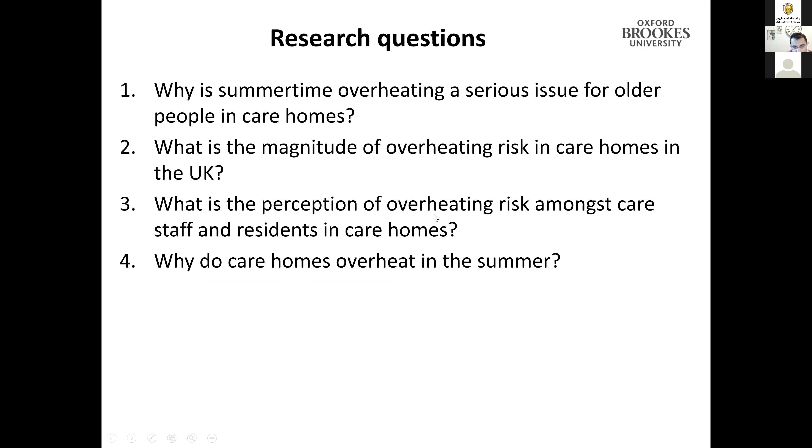Why do care homes overheat in the summer? We understand that they do, but why? And to what extent can we adapt care homes using passive measures? So I'm going to run through the presentation with these questions in mind, and then show you how we can address these questions. Just a little bit about us.

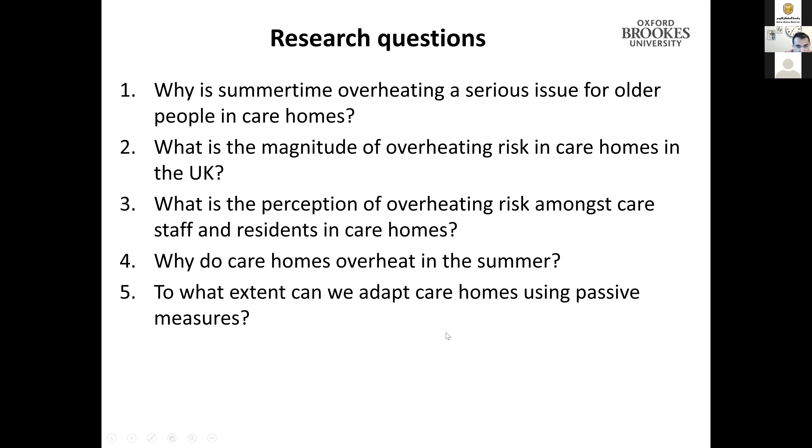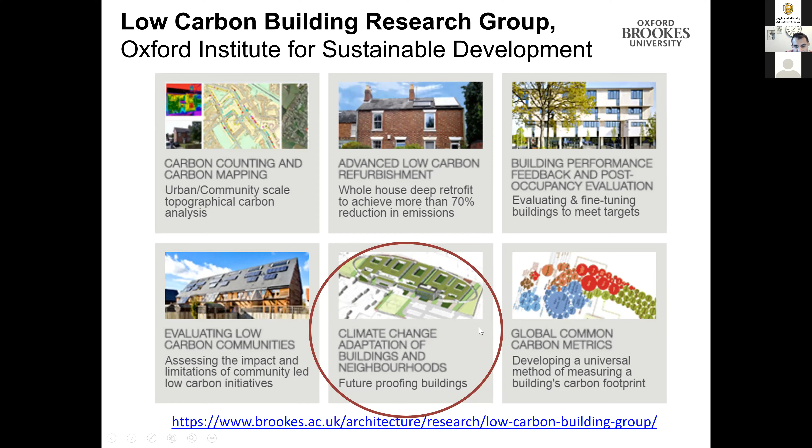I run the Low Carbon Building Research Group and also the Oxford Institute for Sustainable Development at Oxford Brookes University. I'm also now chair of the Sustainable and Resilient Futures Network at the university. We have core areas of research, and I'm going to focus today on our work on climate change resilience and adaptation of buildings and neighborhoods. Within this area, we have a portfolio of research on climate resilience of care settings. I think we are one of the few research groups in the world who research in these settings.

I'm going to run through some of our research projects. We started doing this about 7 years back, where we started with the Joseph Rowntree funded project looking at care provision fit for a future climate. We did 4 case studies across the UK.

We then went on to do a pilot study funded by NERC, the Natural Environment Research Council in UK, called Climate Resilience of Care Settings. We called it a pilot study because we looked at about 5 London-based care homes, and this was with UCL and LSHTM.

Then the third project, which is ongoing, is also NERC-funded, but now extending the pilot study spatially and over time. We have a nationwide study where we are recruiting 50 care homes. It's probably the definitive study on care homes in the UK, and we are also trying to do longitudinal monitoring.

Not just one summer, but three summers. This is ongoing at the moment. It started last year but stalled because of COVID, and now has restarted. So I'm going to run through these projects to answer the research questions that I've set up.

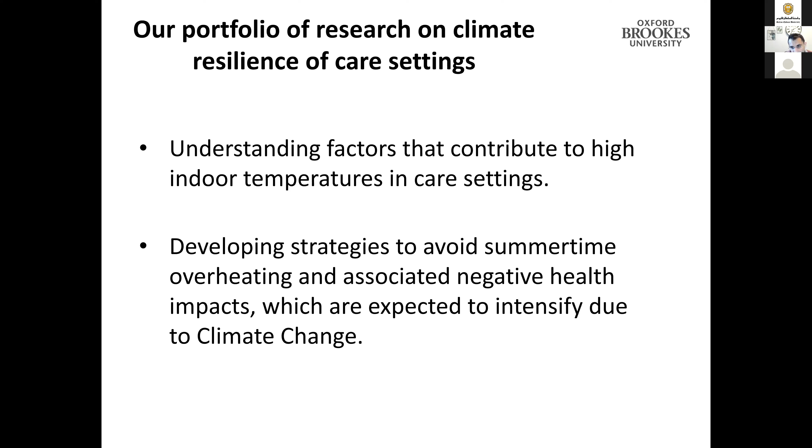Our portfolio of research is focused on understanding the factors, both technical and social, which contribute to high indoor temperatures in care settings. We want to develop strategies to avoid summertime overheating and look at negative health impacts, which are expected to intensify due to climate change. We've been fortunate to work with social scientists and health scientists on this project, looking in detail at the comfort and health effects of overheating.

So just addressing the first question: why is summertime overheating a serious issue for older people in care homes? I think to understand that, we need to also look at why heat and older people matter. What is the link there?

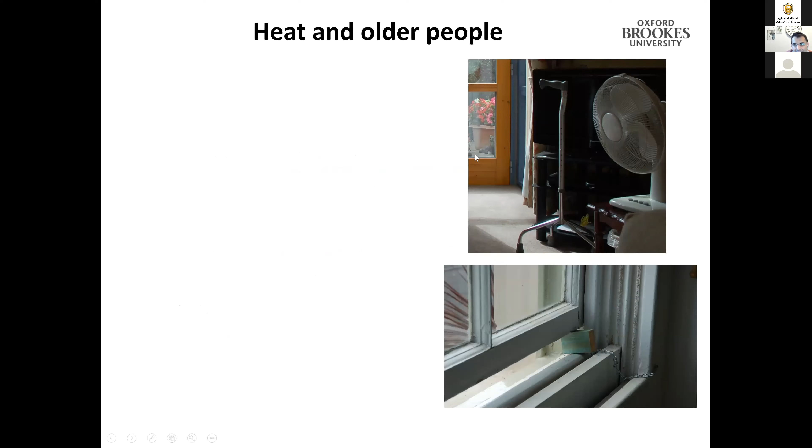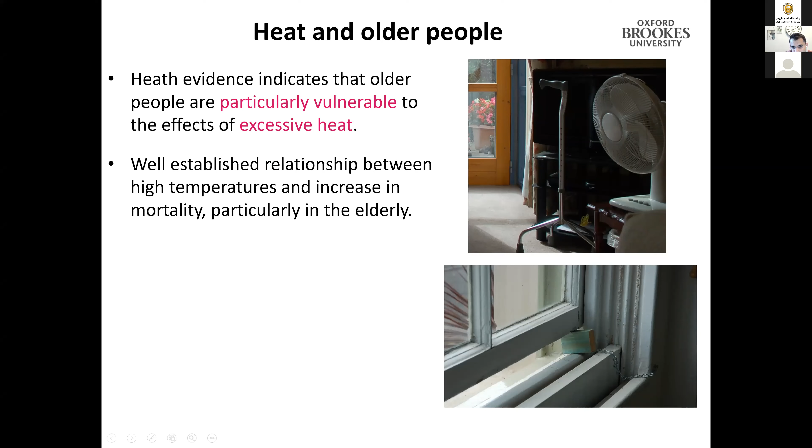If we look at health evidence, it indicates that older people are particularly vulnerable to the effects of excessive heat. We also know there's a well-established relationship between high temperatures and increase in mortality, especially in the elderly. This is evident because projections show that excess heat-related deaths per year in the UK could go up to about 7,000 from the current figure of around 2,000, and most of them are likely to happen among the elderly in poor health. But despite this growing evidence, awareness of thermal risks in the UK, especially the links with vulnerabilities in older age, is still focused very much on the cold rather than the heat.

I'm not arguing that we should not focus on the cold side, but what I'm saying is that it needs to be balanced, and we need to look at both the winter period and the summer period.

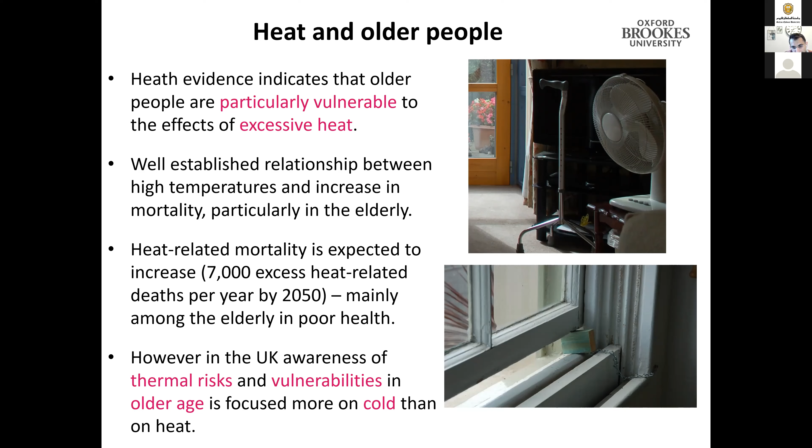To really adapt care homes, if we link this with the care sector, we know that heat-related mortality during heat waves was highest amongst occupants of care homes, both residential and nursing. And this happened despite the presence of care staff that could protect vulnerable residents.

The UK 2017 Climate Change Risk Assessment and the following National Adaptation Programme has identified summertime overheating as a major risk and health and research priority, both for the health and social care system. Our research was heavily cited in these two documents.

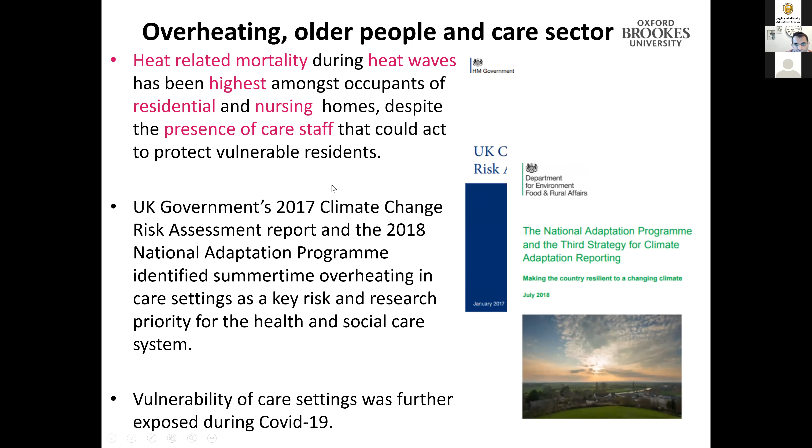We also know that the vulnerability of care settings has been further exposed during COVID-19. So alongside COVID, we also have the issue of overheating. It's kind of a double problem that's going to happen.

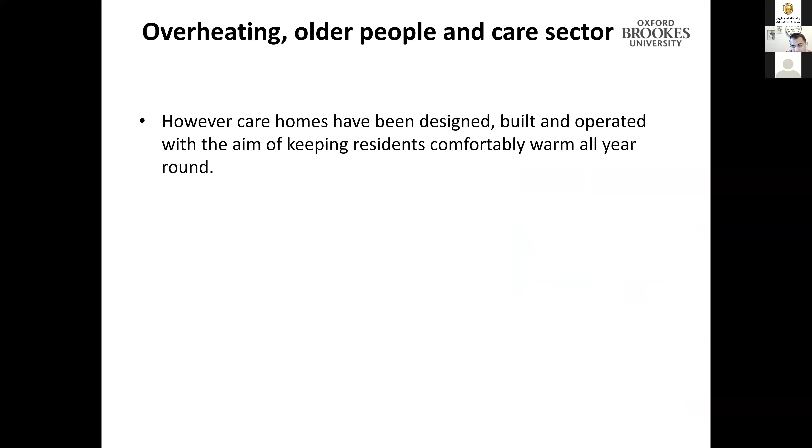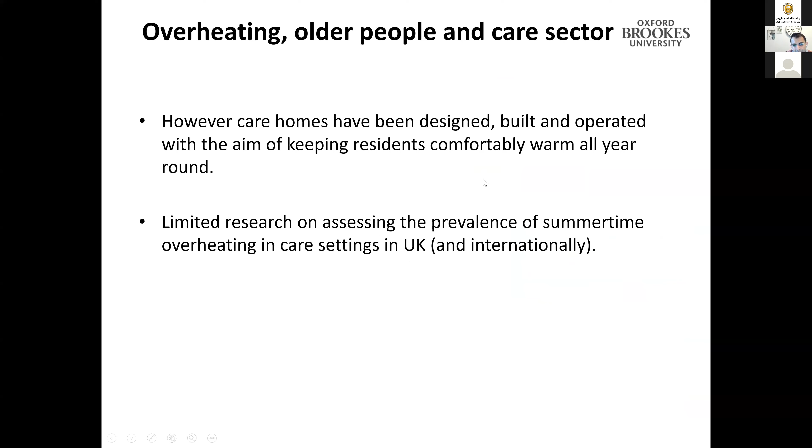But despite all this, care homes have been designed, built, and operated with the aim of keeping residents comfortably warm. That's a key thing - they have to be kept warm all year round. There's very limited research on assessing the prevalence of summertime overheating risk in care settings, in the UK and internationally. I know there's some research happening in Australia now, and Spain as well. So what are the risk factors that affect this risk of overheating?

If you look at the location first, of course, if you're in a place like London, you're bound to get urban heat island effects. There's also regional and local variations. There are also issues with building design - you have high levels of thermal insulation and air tightness increasingly now, for other reasons, which minimize heat loss but also increase unwanted heat gains.

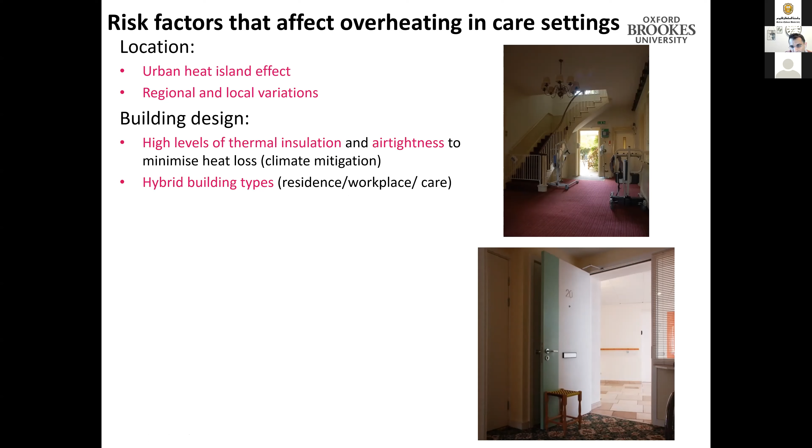The thing to note about care homes is that it's a hybrid building. This is not just a residential building - it's a workplace for some, it's a caring place. And you have these conflicting requirements sometimes of different actors who are inhabiting these buildings.

There's obviously resident behaviors and practices. Older people we know are more sedentary, they spend more time indoors, they're also physically and mentally frail. They are less able to adapt to short-term changes in environment, and their perception of risk and their own vulnerability is quite low.

And then obviously there are the institutional care and management practices, where provision of warmth is perceived to be associated with good care. Adaptations can be enabled or constrained by management practices, norms and expectations, and the regulatory framework. I'll show how health and safety regulations sometimes conflict with adequate window opening, for example.

This came up recently in the media, where energy prices in the UK have increased tremendously. The Guardian reported that care homes, many of them, could close down because of energy bill rises. A typical care home of, say, 50 residents spends around £50,000 annually on energy costs and simply cannot cope with rising energy bills.

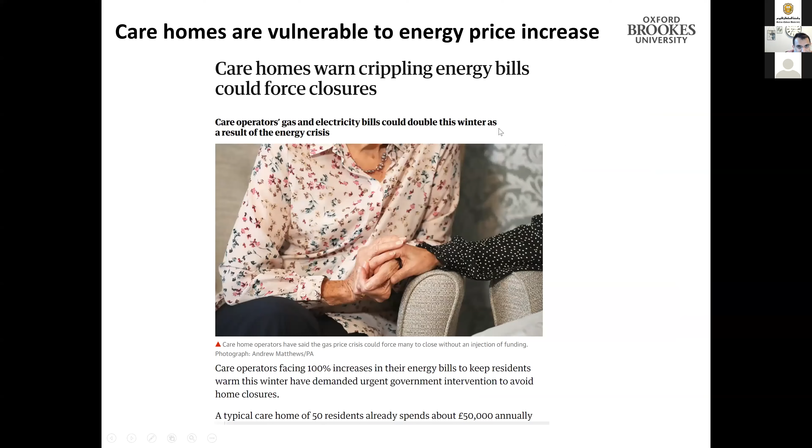So we can't say that they're overheating and just put in air conditioning to cool them, because it's simply not cost effective and obviously not good for the environment either. Older people, by the way, do not like air conditioning. They think of them as draft-producing machines. So whichever angle you look at, care homes are pretty vulnerable.

So let's go on to the second question: now that we know there's certainly a risk, what is the magnitude of that risk in care homes? I'll start with the first study and quickly run through some of these slides to show you what we found.

This is the JRF study, the first study we looked at, about 7 years back now. We looked at 4 care settings, deliberately choosing 2 care homes. For those who don't know, care homes are spaces with single bedrooms with access to on-site services. There were 2 of those, with 20 to 40 beds.

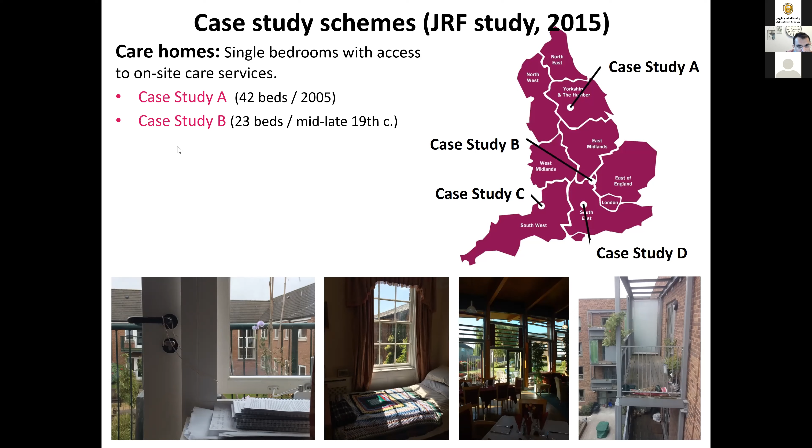We also looked at 2 extra care homes, which are more independent—rented or purchased flats or bungalows designed for people with some level of mobility difficulties, with help and support available in an emergency. So we started off looking at these 4 care settings. There was very limited evidence at that time.

We followed a mixed methods approach. Our approach through this research has been socio-technical. We've looked at building surveys to find out which design features are enabling or constraining residents and staff from controlling their thermal environment, and we've been monitoring environmental conditions.

I'll start with 2015 and bring you up to 2021, and you'll see how this problem has aggravated. We also looked at climate models—future weather data for the 2030s, 50s, and 80s, using dynamic thermal simulation. We also did interviews with designers, development directors, the client, scheme managers, carers, and residents.

So you can see there are lots of actors involved, really to see how building design, management, and occupant practices address overheating risks and vulnerabilities. We've brought together surveys, monitoring, modeling, and interview techniques to look at the prevalence of overheating.

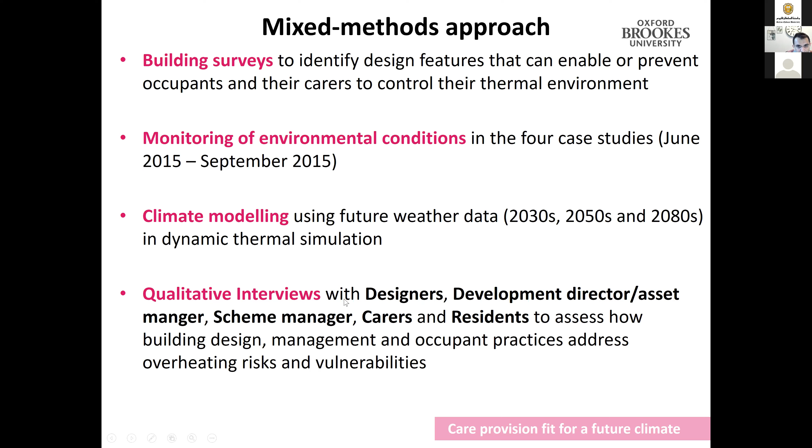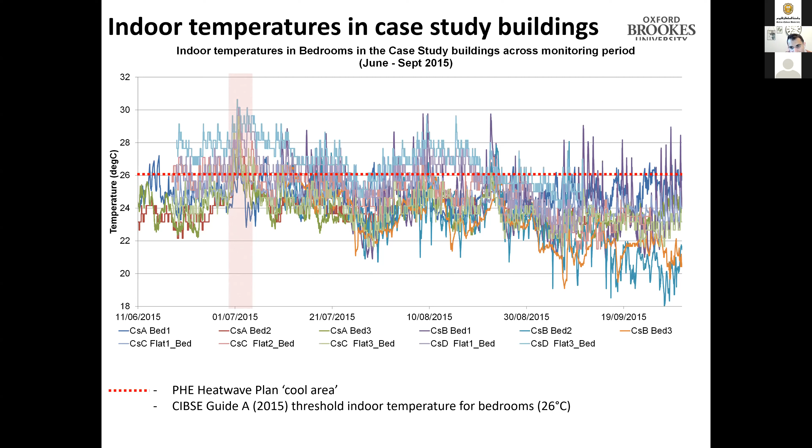In July 2015, there were 3 days which were very warm, very hot actually, and you can see temperatures rise considerably then. We looked at those temperatures against the adaptive method and the static method, which consider 26 degree and 28 degree thresholds. Whichever way you look at it, overheating is happening in care home bedrooms, communal areas, and offices, with different orientations and constructions.

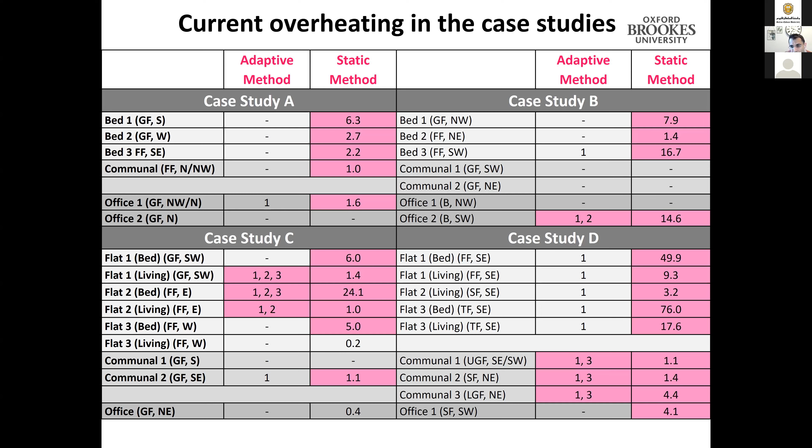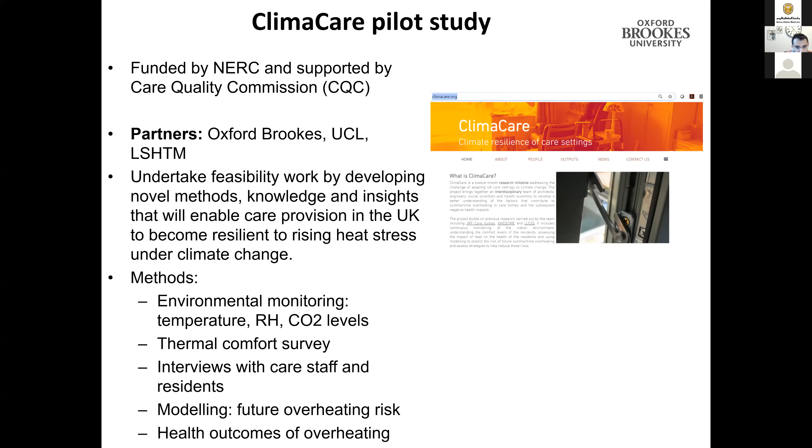This is now the summer. Now you are on mute, so can you change? Okay. Again, can you change? Yeah.

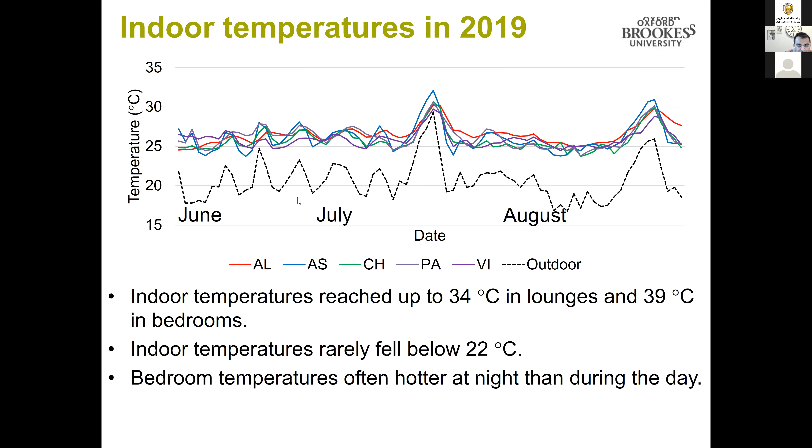Now it's essentially—so we found that indoor temperatures rarely fell below 22 degrees, and bedroom temperatures were often hotter at night than during the day. And whichever overheating metric we use, whether it was the static CIBSE guide A, the Public Health England threshold of 26 degrees, or the dynamic overheating metric, overheating was occurring in all the care settings. Again, these were all care homes, not extra care homes, and that is of course a matter of worry.

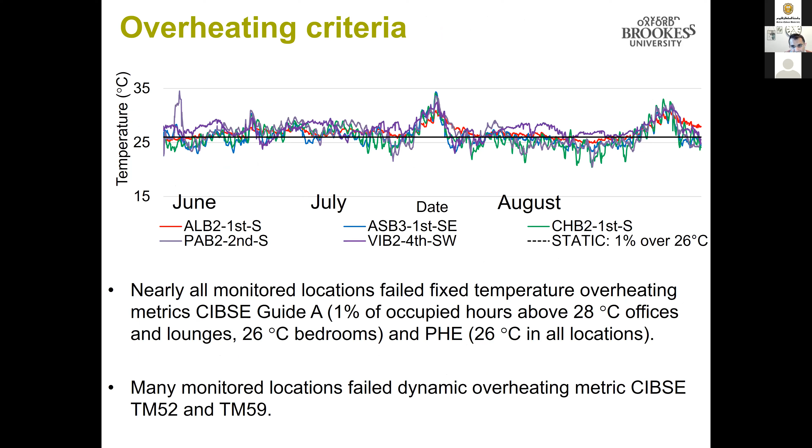We then compared two care homes: one older care home, about 200 years old, which was a Georgian house converted to a nursing care home, and a very new, large care home, the kind built nowadays. This one had 115 residents; the one called PA had 36 residents. They are almost co-located, in very similar locations in West London.

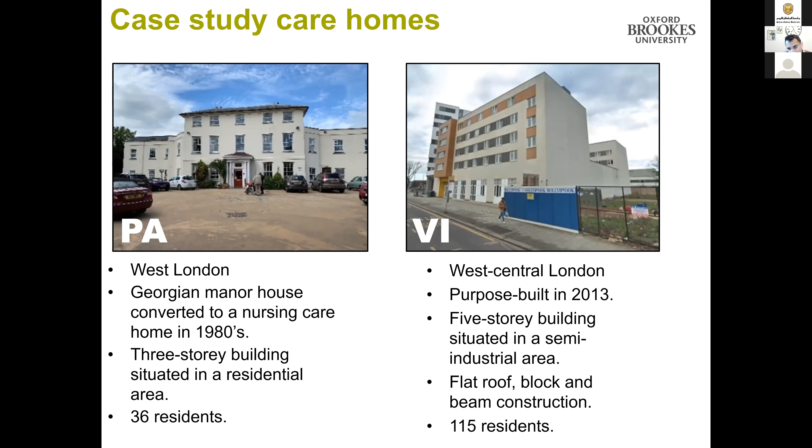And we went into detail about whether there is a difference between a very old care home building—with its thermal mass and some ventilation—and a newer care home.

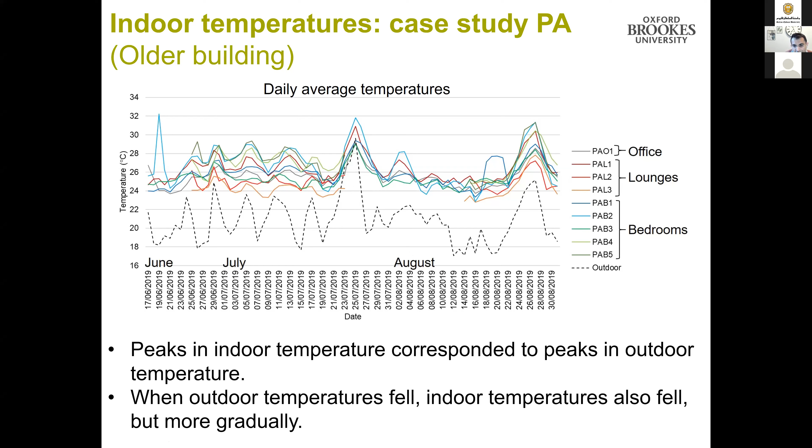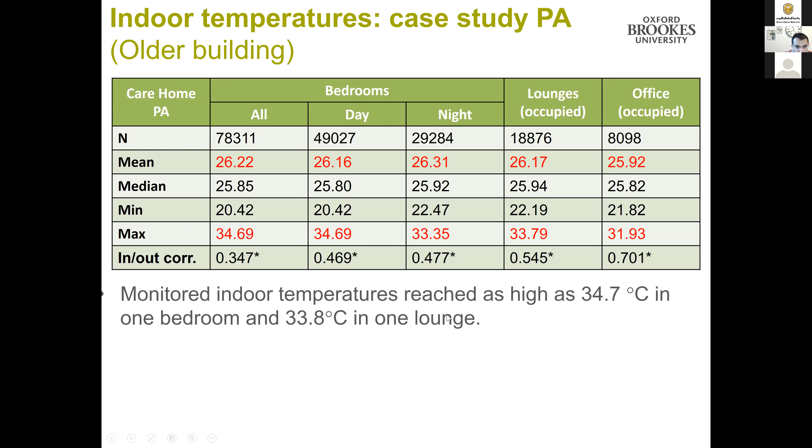You can see the mean temperatures across the bedrooms, lounges, and offices—about 26 degrees on average, with the maximum going up to about 34, approaching 35 almost. The temperatures in the monitored space remained, on average, between 24 and 27 degrees.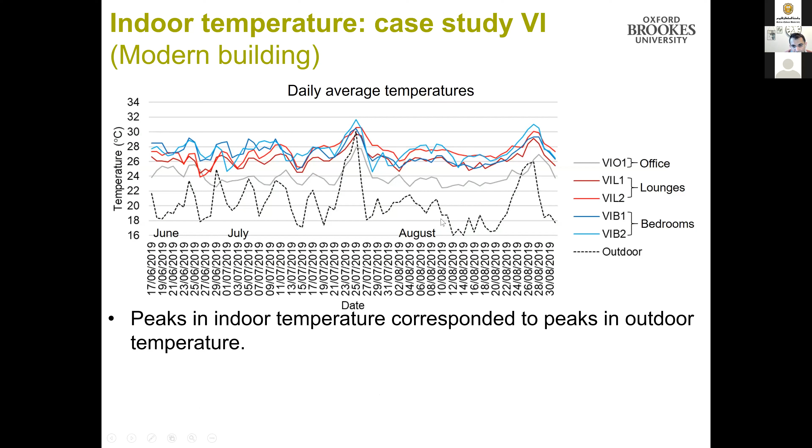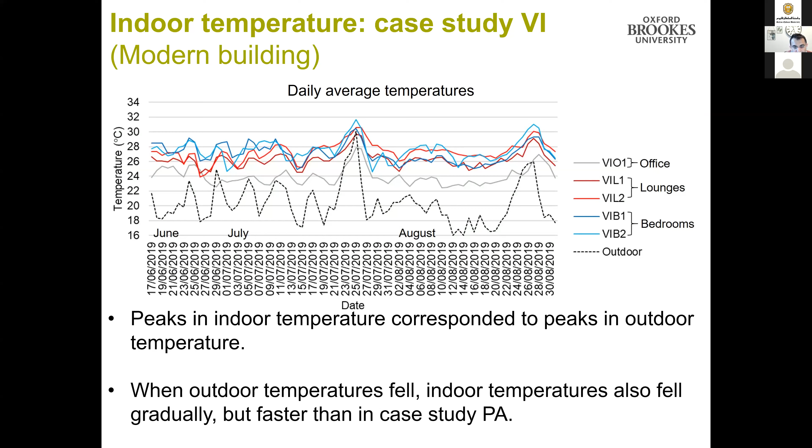So when outdoor temperatures fell, indoor temperatures also fell gradually, but faster, in the modern building. And you can see one of the differences, that the mean indoor temperatures in the modern building were higher. They stay around 27 degrees, which is pretty warm. And they even reach 32.5 in one bedroom.

So essentially, overheating was happening in both care homes, but the severity was more in the modern building. And this is a very new building, to be honest.

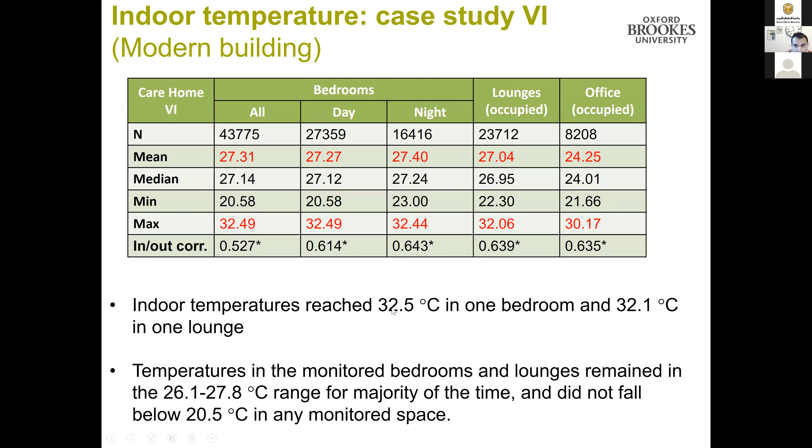So what were the key findings of the monitoring? Overheating was definitely prevalent and prolonged. It was less severe in the older care home. The older heavyweight care home experienced lower mean temperatures, as I showed in bedrooms, both day and night, also in lounges and offices, than the newer care home.

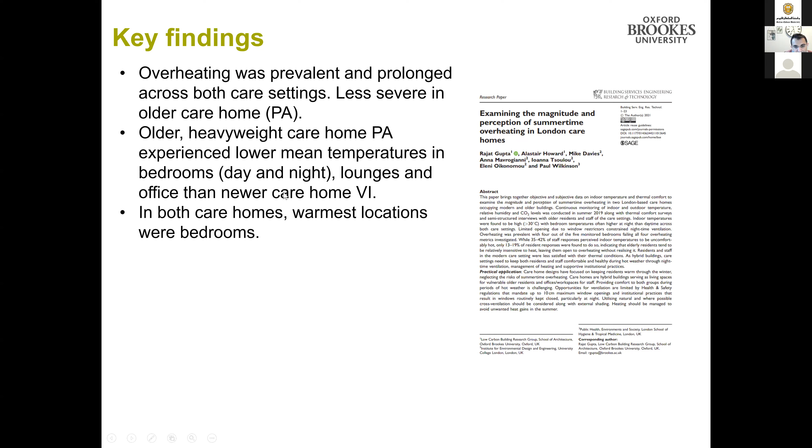But what is interesting is the warmest locations were bedrooms, where the least adaptation is happening probably. And one of the reasons it happens at nighttime is because they're occupied, doors and windows are closed. 99.9% of the time they have single-sided ventilation.

Also, we found from the practices side that carers were spending more time in lounges than in bedrooms, and they were more likely to implement strategies for cooling when in the lounges rather than in the bedrooms. And that's also very interesting. So it's a mix of what's happening physically and also what's happening between people and the building, that interaction.

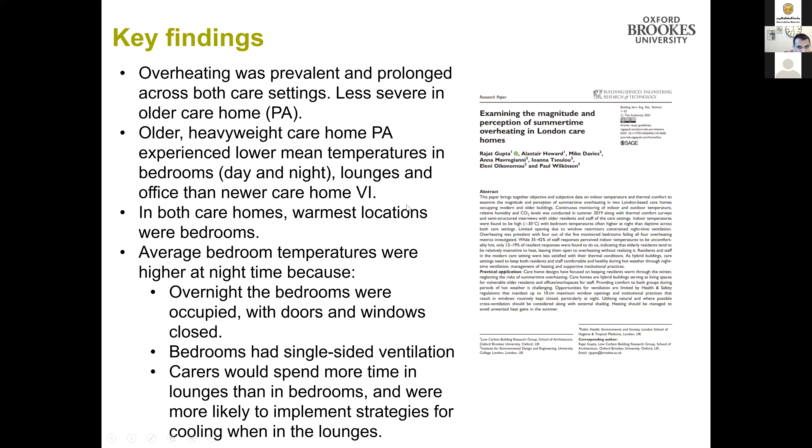And this is now published in a paper in the Building Services Engineering Research and Technology Journal. So essentially, the first study, the JRF fund, showed that this was happening and may be a risk. And then the NERC study showed that it was a risk, definitely, and worse as compared to what we had in 2015-16. This is the project we are doing now.

So I don't have lots of findings because we are still recruiting care homes and doing the study, but I still wanted to show you some very initial results. This again, as I said, is continuing to 2023. Same partners: Brookes, UCL, and LSHTM.

We're now trying to quantify this heat risk and care provision at a national level. So it's the go-to project now, really, for care homes. We aspire to recruit 50 care homes across the country. We've already done 36, I think. So we are very much on our way.

And we want to do longitudinal monitoring. That's again lacking - the data that existed was short-term monitoring in the summer. This hopefully completes 2 years, or maybe 3 years, of monitoring. Let's see how much we can get in.

We want to assess the impact of heat exposure on the health of residents. So doing very detailed measurements by health epidemiologists, doing core body temperatures and seeing the relationship of that with heat waves, and develop a building stock model of the care sector, really, of care homes, which is currently lacking in the UK. So we feel 50 care homes will give us that strength to do so.

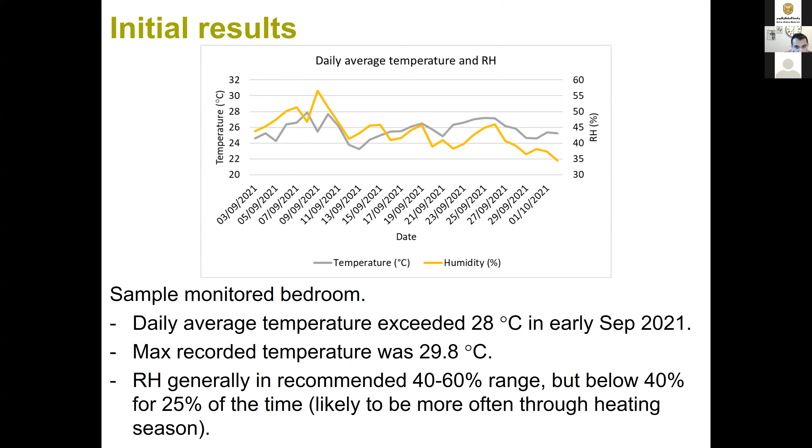But then the other bit is that physical measurements are showing definitely there are elevated temperatures. Whichever criteria you use for overheating risk assessment, it is happening.

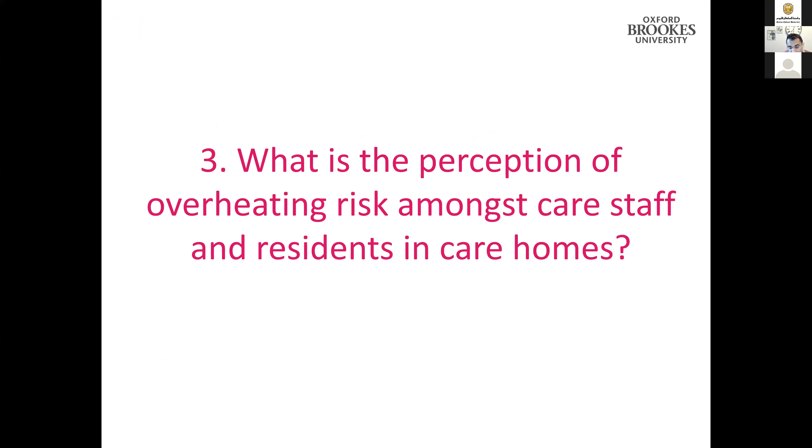But then what is the perception of overheating risk amongst care staff and residents in care homes? When we started this, there was almost no evidence on this in terms of comfort perceptions of people. So we looked at both residents and staff, and this is just over 650 responses from the 2 care homes, from the NERC pilot study.

So essentially, residents are pretty insensitive to heat, which is a bigger issue, because it means some external intervention is necessary - older people don't realize when the threshold gets crossed. And you can have very serious health implications if your core body temperature rises quite a bit because you're in a very heated or hot space.

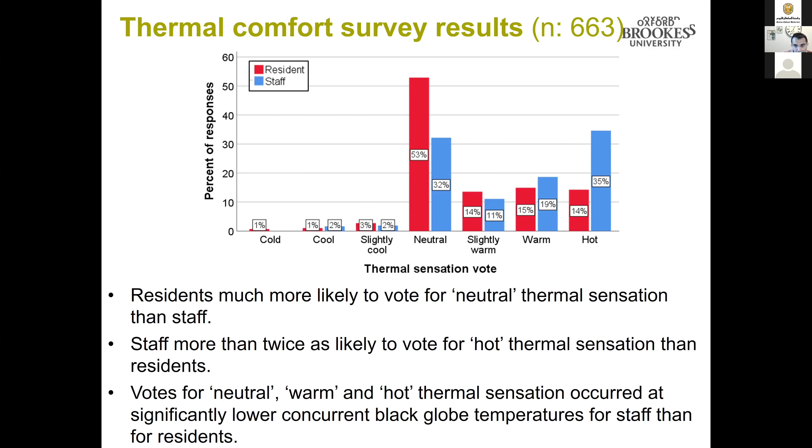Staff, on the other hand, are feeling hot at much lower temperatures because they're working all the time, and the older people are more sedentary. You can see this across the 2 care settings that I was talking about - PA is the older one, VI is the newer one.

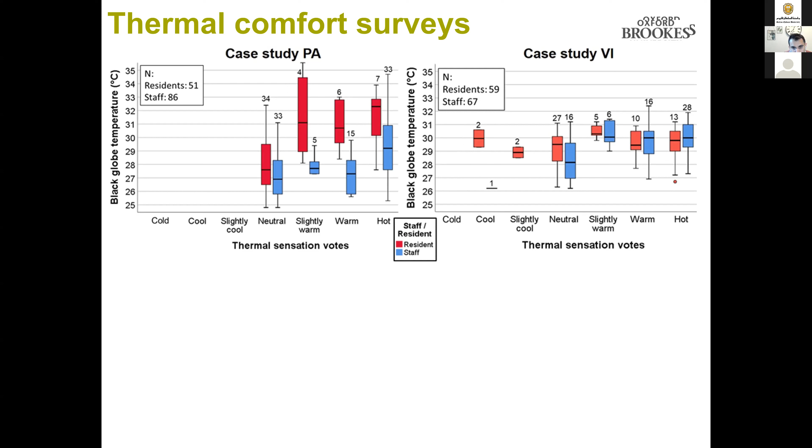You can see that when you look at the black globe temperatures against the thermal sensation votes, there's disparity between indoor temperatures that staff consider hot. Look at the difference - staff are feeling hot at much lower temperatures, residents at higher temperatures. This is very much clear here. The newer one, the difference is slightly less.

The median temperature when staff described themselves as feeling hot was around 29 degrees, and for residents it was 32 degrees. So clearly some external intervention is necessary because residents are seemingly insensitive to heat.

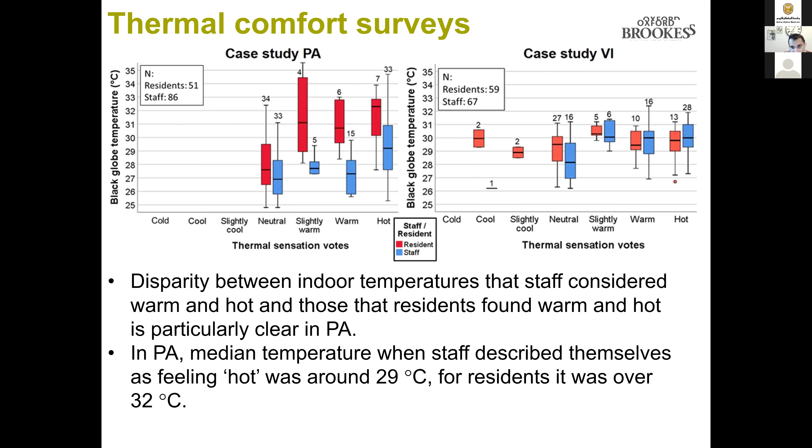When we ask staff, obviously you're feeling hot, how do you cope up with it? The view is that it's their home, it's a resident's home, so it's our working place and we have to put up with it. But I think there's health and well-being issues here, both for staff and residents.

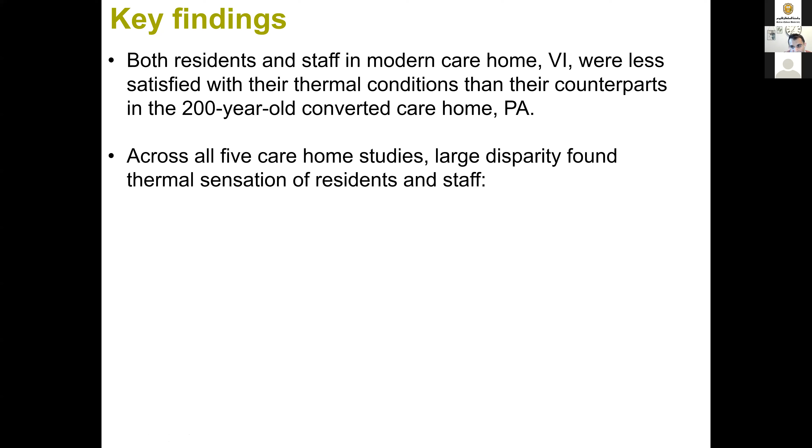So what did we find from the thermal comfort surveys? Both residents and staff in modern care home were less satisfied with their thermal conditions than their counterparts. That was kind of obvious. There was large disparity across all 5 care home settings between thermal sensation of residents and staff. Residents rated their thermal sensation as neutral even at temperatures of 32 degrees, and staff members were twice as likely as residents to rate thermal sensation as warm or hot.

Probable reasons, as I said, was because of the difference in activity, obviously between passive residents and active staff. Of course, elderly people also have lower metabolic rates. So that disparity can be explained, but certainly needs to be addressed.

Then the fourth research question that I want to look at is - we've shown that the magnitude of the risk is high, overheating is prevalent, it's prolonged. The perception of overheating is mixed amongst residents and staff. The question really is, why do they overheat? Why are these care homes overheating in the first place?

There's some very interesting findings here, and I'm talking across the projects now. First, I think there's this culture of keeping older people warm, because there's this perception that older people are vulnerable to cold, not heat. And I think that needs to be challenged. This perception is completely ingrained from designers of care homes to frontline staff, and that is a big problem in itself.

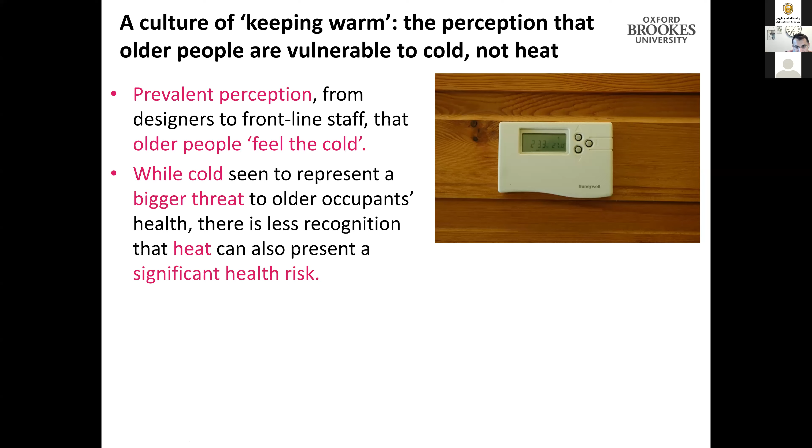While cold seems to represent, of course, a bigger threat, there is less recognition that heat can also present a significant health risk. There are conflicts with health and safety requirements where window restrictors are put in, because there is a fear that older people might fall. I've never figured out how many people have actually fallen through the windows - try to ask CQC, because I think this is one of the rules that might need a bit of investigation and consideration. But they only open about 10 centimeters, which is not enough if you have a heat wave.

And there's low prioritization of overheating and future climate change amongst the briefing and the design teams, because they think it is not a risk of present, it's a risk of future.

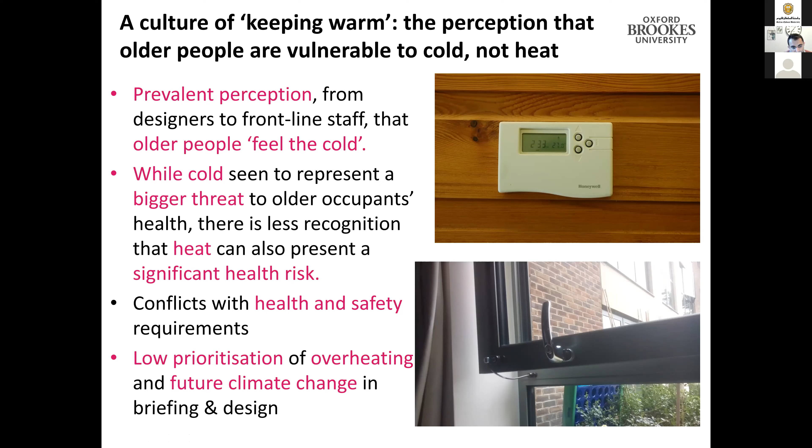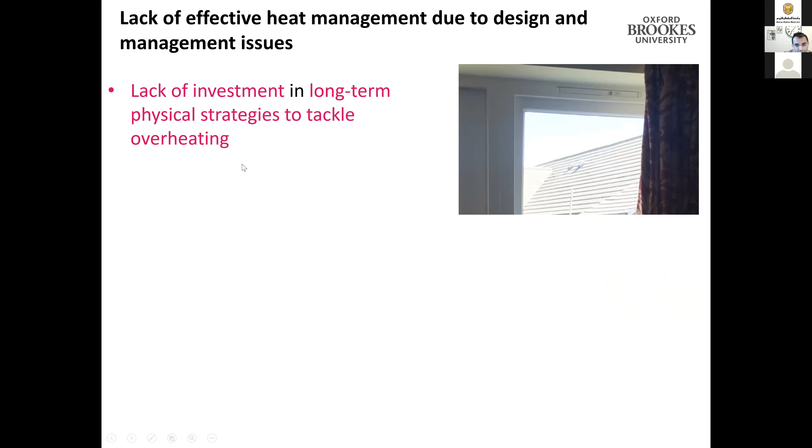There's a lack of effective heat management practices, and a lack of investment in physical strategies, because that's not what is happening. Shading, for example, external shading should be designed in, so you keep the summer sun out and the winter sun in.

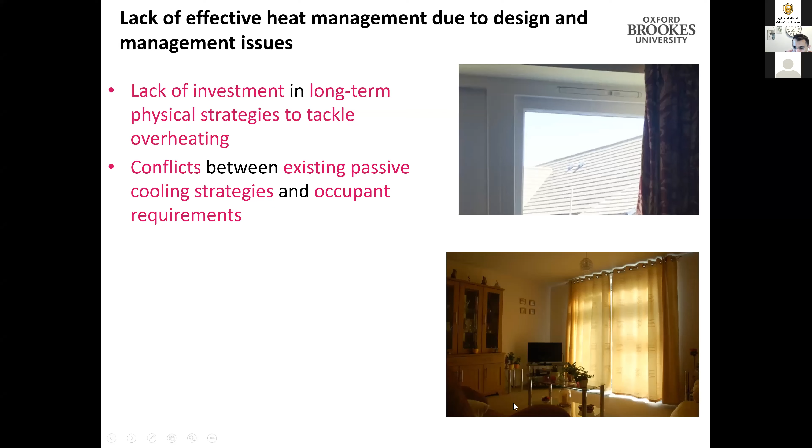There's conflict between passive cooling strategies and occupant requirements. You can't simply say let's put the curtains on because it's quite warm, because older people want to have a view out, and that takes precedence over drawing the curtains.

The centralized heating and hot water systems lead to unwanted heat gains, because the pipework is usually not insulated and the heating stays on even in the summer. So you can have very hot corridors.

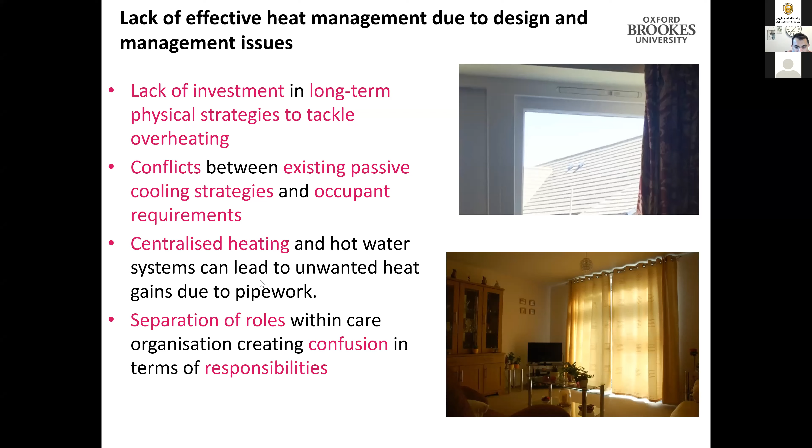There's separation of roles within the care organization, which creates confusion in terms of responsibilities. Nobody knows who's going to switch off the heating system, who's going to manage the thermostats, who's going to manage the indoor temperatures. That needs a bit of rethinking.

There's a lack of awareness about the heat wave plan as well, which was not a pleasant find, because Public Health England in the UK does give all that guidance. But right from the design briefs, the priority was on other issues, safety, security, and I've already told about window restrictors.

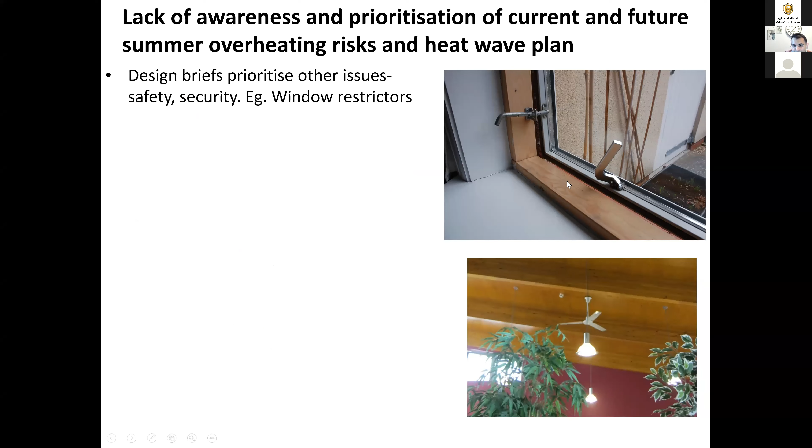Managers were aware of the Public Health England heat wave plan, but the frontline care staff were not that much aware. The aspects of the plan that were implemented were very ad hoc - pushing fluids, providing electric fans.

There was hardly any consultation with the resident GPs about health risks. And this is worrying, because some of them are on medication, and it's important to maintain that link with health professionals.

Public Health England suggests providing one cool room which has temperature below 26 degrees within each care home in case of a heat wave. But practically, there's a lack of suitable rooms within care homes.

You can't just have a space like that. Also, it's impractical to move all occupants into one room, because some of them might be bedbound, and it's simply not possible. So I'm not sure if this is actually practically being implemented.

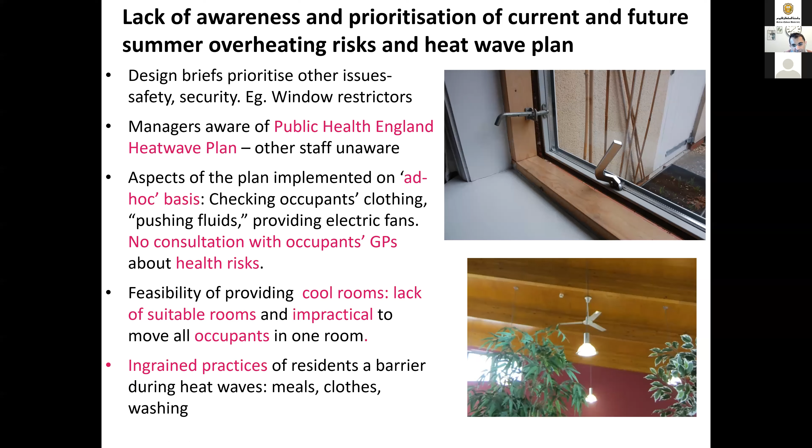And then there are also ingrained practices of residents, which can be a barrier during heat waves - having hot meals, continuing to do that during heat waves, not changing clothing ensembles, not doing frequent washing. So these kinds of practices also aggravate that risk.

But then the final question is, to what extent can we adapt care homes? We know there's a problem. We know there's a difference in perception of it. We also know why they overheat - it's a combination of physical, social, and practice-related reasons.

But what can we do, or can we do something using passive measures? I'm obviously going to lobby for passive measures rather than active measures. But in our suite of measures, there are quite a few. You can manage heat, look at insulation levels, external surface albedo, window solar protection, thermal mass, ventilation regimes, green-blue infrastructure, maybe fans where necessary.

But then what did the models show, and what is the reality? Because I'm always kind of looking at the difference between what modeling tells us and what the reality is, because frequently they're not the same, as we know.

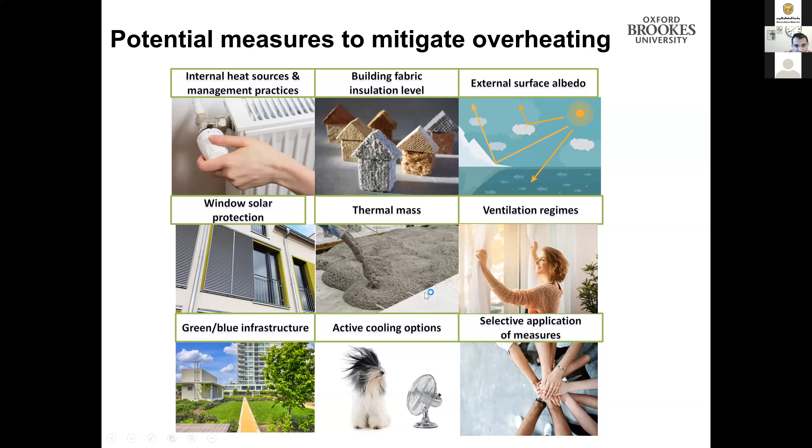This is a paper we published through the JRF study, and we got a recent paper as well which confirms the same thing. The modeling results confirmed there was a need to implement long-term adaptation approaches, really external shading and cross ventilation, which is quite hard. Because of the pandemic and other reasons, cross ventilation is really important now, so I would say that's the single most important measure we should look at for care settings.

The interviews with designers showed little awareness amongst designers about the risk of overheating, and they really focused on the current situation rather than long-term planning. Remember, these buildings, once built, will last for 50 or 100 years. So we are almost compounding problems for the future by not having enough design for overheating mitigation happening.

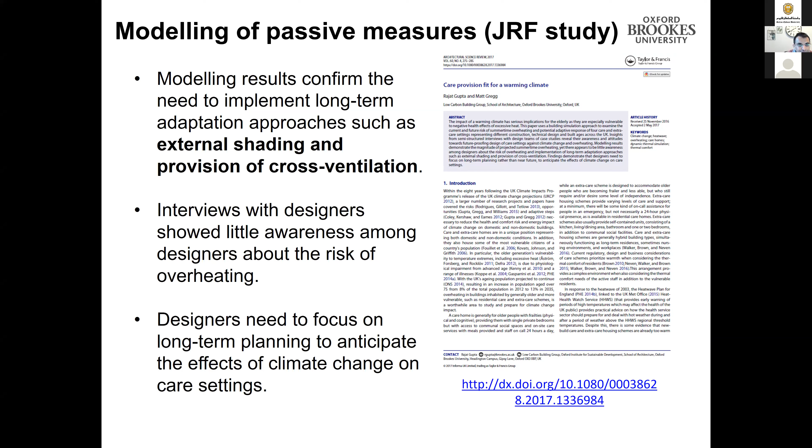The recent paper that I was talking about, from the NERC study, reconfirmed it. This has just appeared in Energy and Buildings, so you can have a look.

Our simulations found that nighttime ventilation again was the single most effective passive solution for the current climate. A combination of nighttime ventilation, external shading, and high albedo external walls could provide resilience up to the 2050s against the overheating risk.

So simple measures, quite difficult. I say simple, but they're not done. So I wouldn't say they are simple.

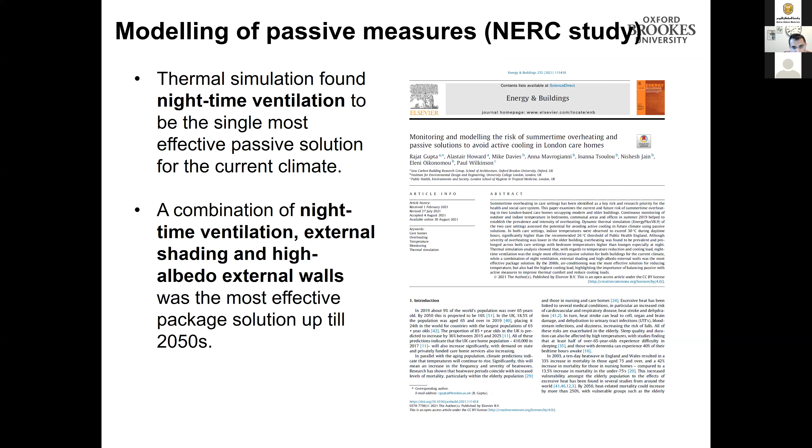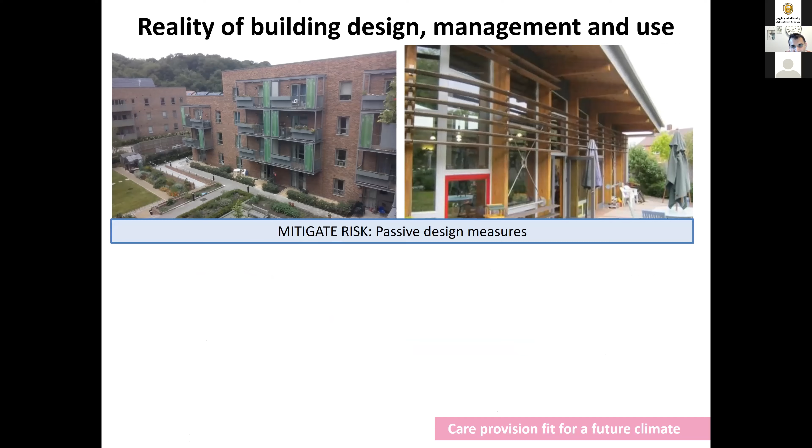But what happens in reality? This is what the models tell us, but in reality, yes, one out of our five care homes had some shading, but that's just one, or possibly two. But then there are passive measures or physical measures that actually exacerbate the risk.

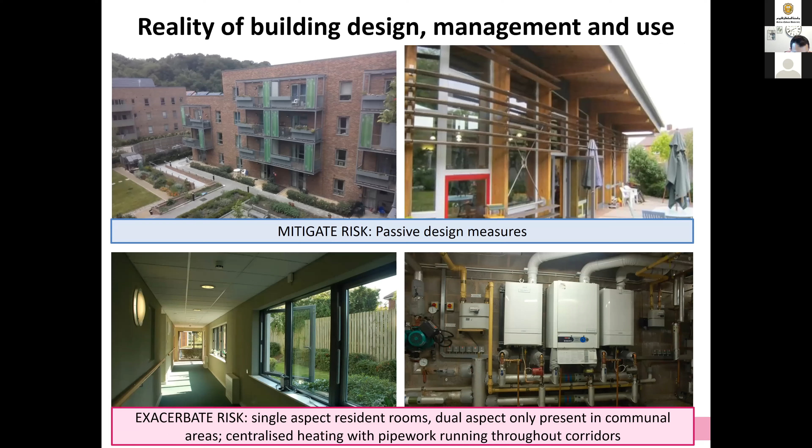For example, you have single aspect resident rooms. Dual aspect is only present in communal areas. The centralized heating with pipework runs throughout corridors, causing overheating. Health and safety requirements conflict with this.

So the models might say that these things are necessary and worth doing, but in reality, either they are not done, and if they are done, then they may not be managed in the way our models assume. So there's a big disparity between this.

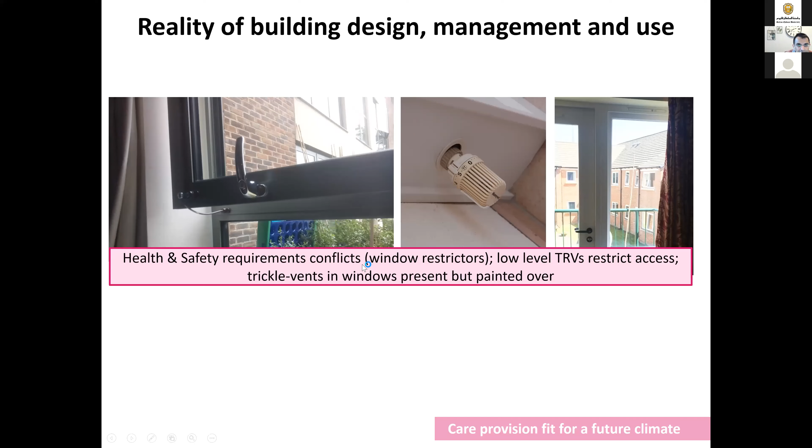So I think I'm going to end with some points for discussion, because I think we have some time for discussion. So I'm going to raise these, and hopefully we can have a discussion on this.

It's very obvious, whether from the JRF study, the NERC pilot study, or the ongoing nationwide study of summertime overheating in care settings, that overheating in care homes is prolonged, severe, and prevalent. And worryingly, residents are insensitive to high temperatures. That certainly needs to be looked at, because there are health implications of core body temperatures rising quickly and substantially.

Design for overheating was not found to be commonplace. This is worrying. My question really is, how can innovative design solutions for tackling overheating become widespread? Maybe this is something that needs to be tackled from schools of architecture and engineering, going up to continued professional development, into design practices. And how do we get this culture of making design for overheating mitigation commonplace?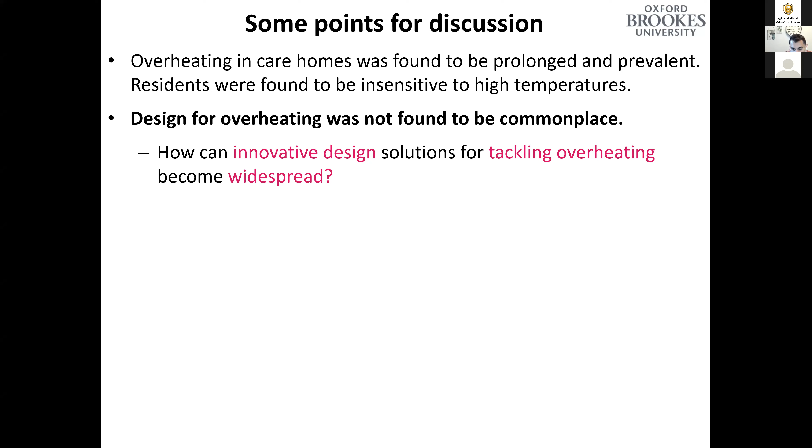Then we must now, given the power we have with IoT and smart sensors, regularly monitor both indoor and outdoor temperatures in care settings and provide rapid feedback to management, care staff, and residents. So my question really is, what is the role of smart sensors and surveys in identifying overheating rapidly and supporting timely action?

Because you'd be surprised, but none of the care settings we went to had any monitoring happening. They had BMS, but as you would expect, not working properly or not used properly. And there is a bigger question here: how can we do smart monitoring and take action as a result of that monitoring to manage the risk of overheating?

Finally, the bigger question: how do we stimulate a culture change within the care sector? We've been fortunate that in the NERC nationwide study and the pilot study, we worked with the Care Quality Commission, who are partners in the project, and they've been hugely supportive in terms of recruitment and taking on board our feedback and recommendations. Really the question is how the Department of Health and regulators can integrate these criteria on preparedness for tackling overheating into inspection procedures. Things are happening.

I understand that CQC has now put in procedures for looking at indoor temperatures, but there is still no maximum requirement that temperatures cannot go above. So how do we get this preparedness for tackling overheating into care sector policies and inspection procedures, because that will probably change the tide.